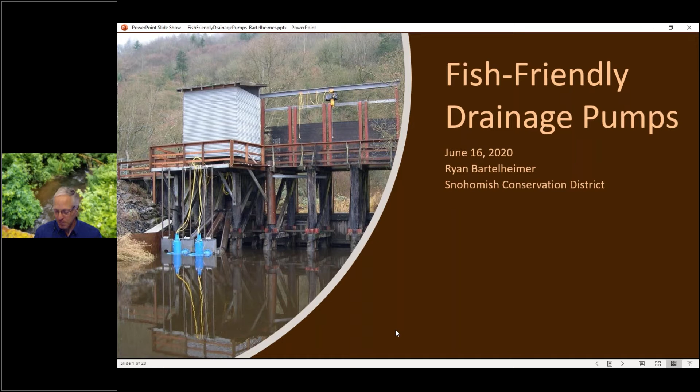Farmers and agricultural producers typically don't have unlimited resources. When it comes to drainage of their farm or operation, they typically rely on gravity as much as possible, which is free, but what's the cost of that? In a situation where the outlet, like in this picture, a tide gate, is into a river, estuary, or slough, especially close enough to receive a tidal signal where the water fluctuates from tides or from rivers running high during flood season or as the snow melts, gravity drainage can be not quite as reliable or predictable as the farmer needs for water table control in their drainage system.

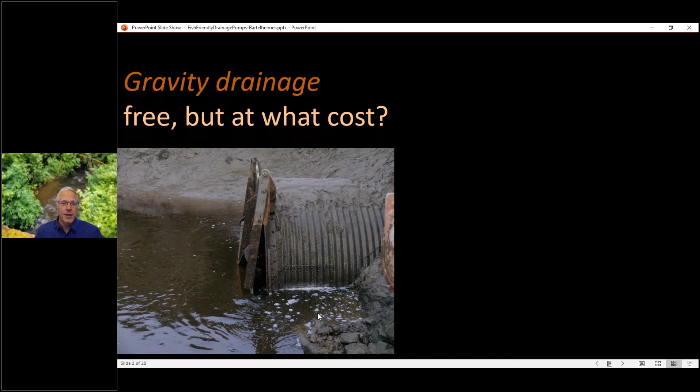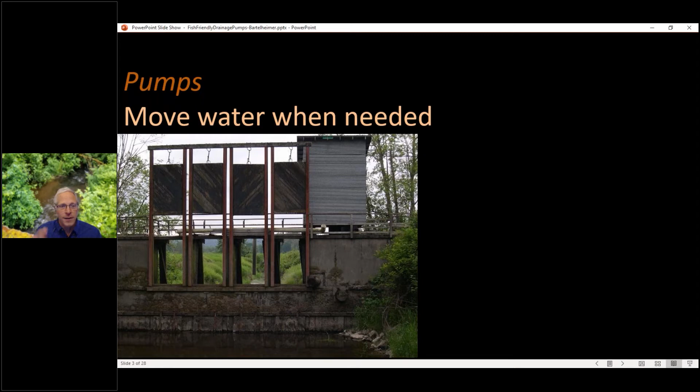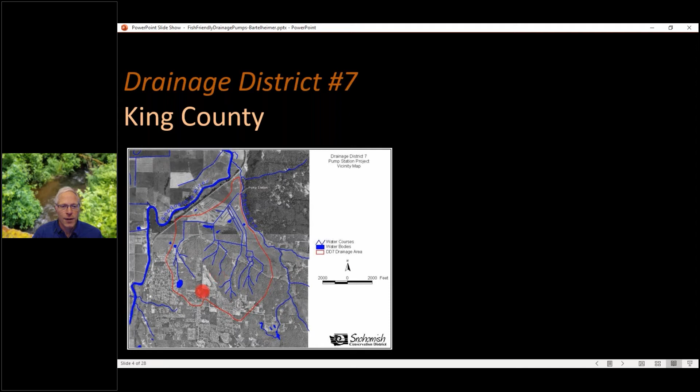Here's a map of this area. The river flowing from south to north here is the Snoqualmie River. This red outlined area is the approximate area of drainage that feeds into creeks and then into the ditches, then through the pump station right at this intersection where it meets Cherry Creek. In addition to fish ending up in this drainage system from floods, there are fish that swim through the tide gates and then spawn in these creeks just north of the city of Duvall, which is in this picture.

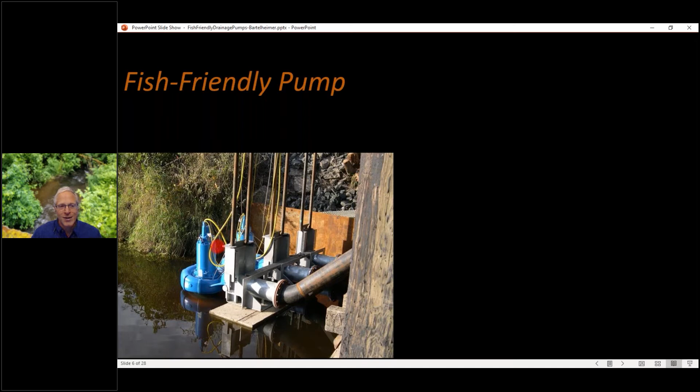This is what these two pumps look like after they were installed at this particular location. They're submersible pumps, which means the motor that drives them is attached to the pump, and all of the connections are watertight so they can be inundated.

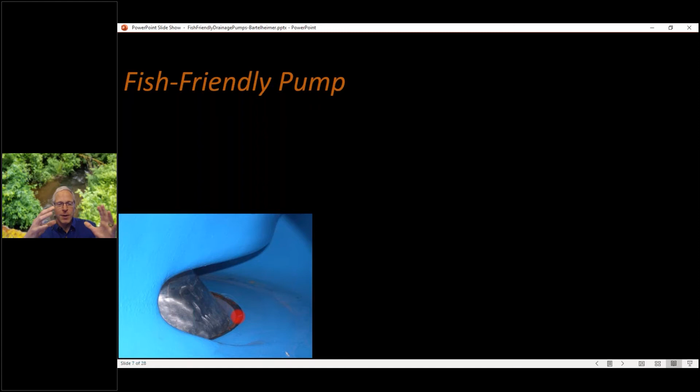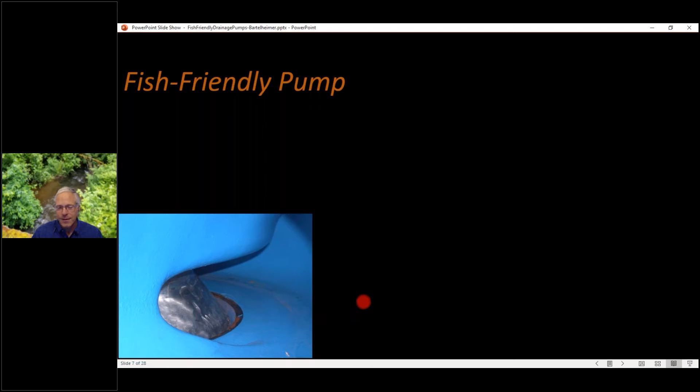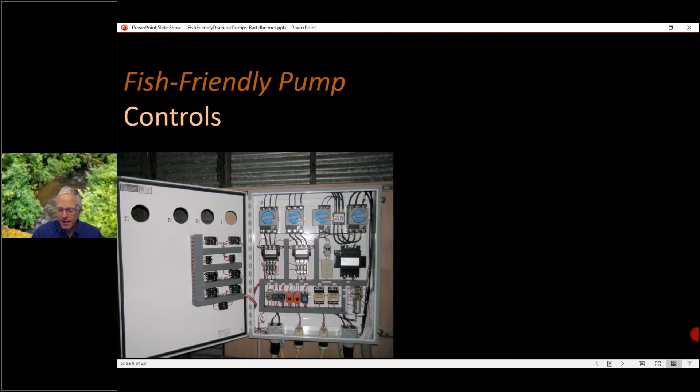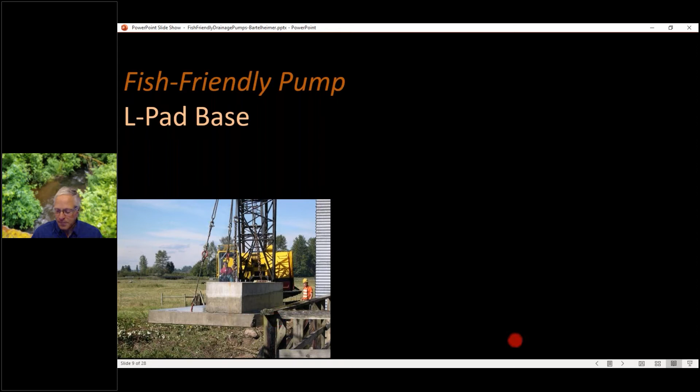I'm going to back up just a little bit and talk about where and when fish-friendly pumps, I think, are appropriate. Number one, a drainage situation - where you've got a drainage district, a flood control district, or maybe just an individual producer or a small conglomeration of producers that have drainage challenges. And also, it's a situation where fish are present or could very well be present.

So a lot of times these pumps are getting to the end of their useful life, and there are permit challenges to being able to just replace a non-fish-friendly pump with another non-fish-friendly pump. A lot of times when you go through the permit process - state, local, federal permits - they want to see things improved for fish. And that's where these pumps help out.

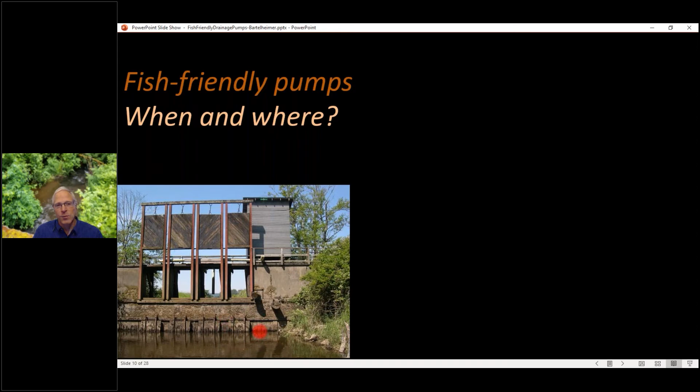Again, this brings up the point, whether it's in a setting like this in a major river valley, or farther downstream in an estuary, it's a competition for limited resources. A lot of very productive agricultural areas, especially in Western Washington, are also areas targeted for fish habitat restoration. These fish-friendly pumps are a great solution to try to make agriculture and fish use more compatible - let the agricultural operations continue, but look for ways to improve the safe use of these areas by fish.

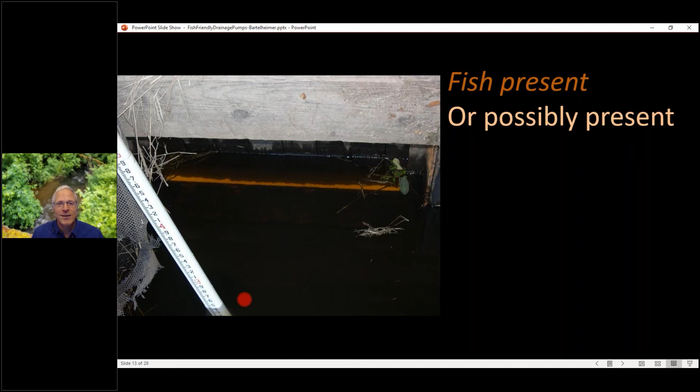By the way, these pumps will handle solids up to about 40% of the size of the discharge pipe. These pumps have a 12-inch discharge, and the size of a sphere that would go through is about 5.5 inches. Just to recap, these fish-friendly pumps are most relevant where fish are known to be present, or they could possibly be present.

And there's that slide. End of slideshow. Oh, somehow it jumped to the end.

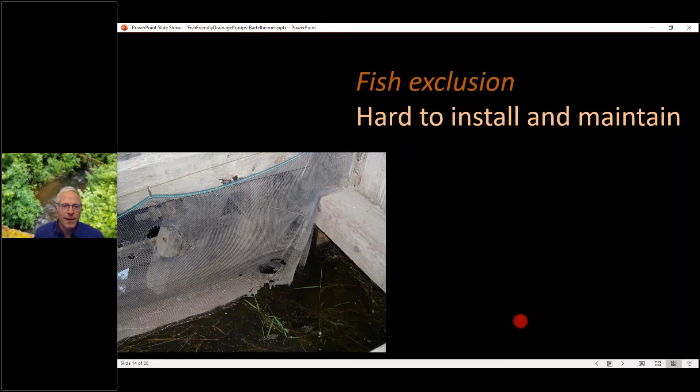The other thing to note, if you did not have a fish-friendly pump and you had fish present, you would be trying to figure out how to exclude fish from that system. It's not easy to do, not easy to maintain. In this picture, this was a temporary approach to try to keep fish out of the non-fish friendly pumps, and I think there were problems both with debris and with beavers chewing on them.

Why a fish-friendly pump? I've covered this quite a bit: keep the fish safe, provide the agricultural drainage that's needed, address inefficiencies or non-fish friendliness of an old system. But another point is to move juvenile salmon or other fish in the direction they're trying to go, without delay.

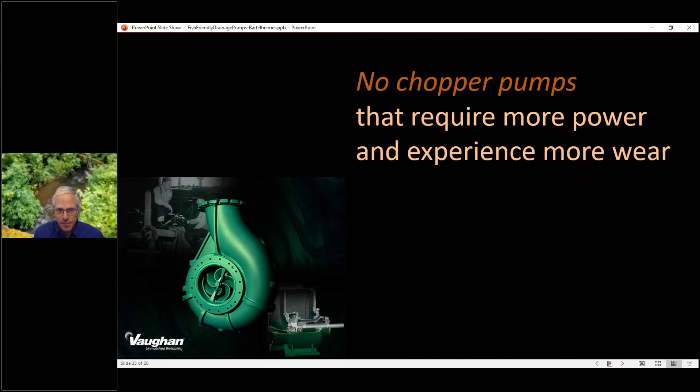Also, again, these pumps are not chopper pumps. If there is some debris that comes through, it generally will pass right through. But we definitely want to avoid having major debris go through, so coarse screens could be appropriate. Part of the strategy for that is a 6-inch clearance between the base of this concrete pad and the bottom of these pumps.

If you think back to the beginning of this presentation, there's a trumpet bell shaped cone on the bottom of these pumps. If you imagine a stick or something else trying to get in there, it has about a 6-inch gap, plus then it would have to make the corner. So this whole system, by its design, is fairly resistant to anything getting in there and causing problems.

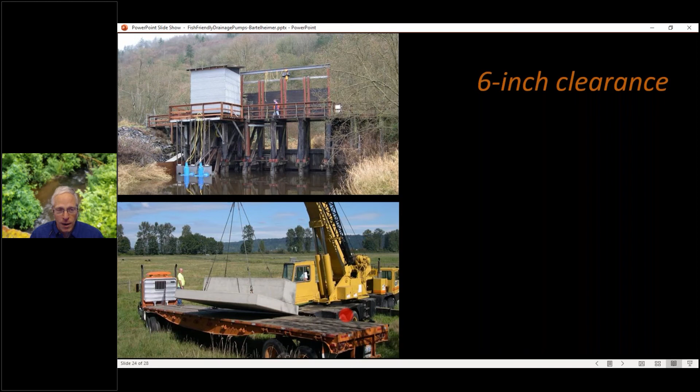Also, as part of its lineage of being a sewage pump, there are fast-out assemblies I didn't point out, but what this enables is these pumps to be deployed and pulled out rapidly. There are stainless steel cables coiled up in this picture. If you imagine a sewer lift station and a pump having a problem, you're not going to dewater the whole vault, pressure wash it, and get in there to work on the pump. You're simply going to hook onto the cable, lift the thing out, put it in a sealed truck, and go deal with it someplace else, hopefully dropping a replacement pump in. So they're very quick to deploy and pull out for maintenance.

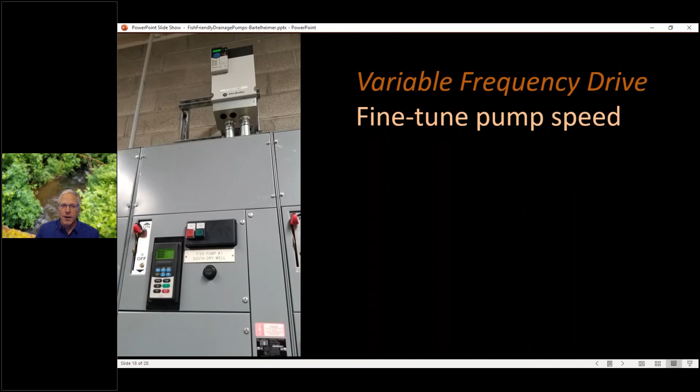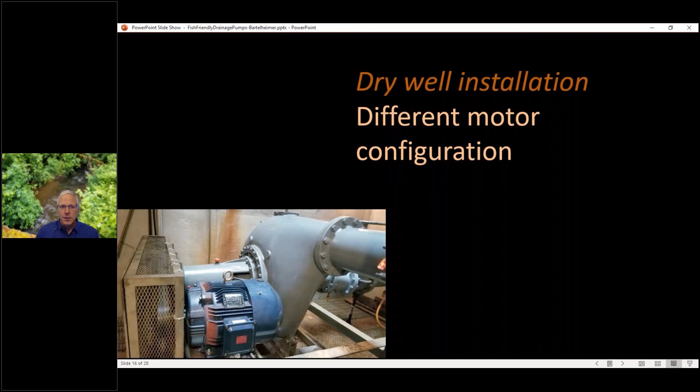As far as maintenance goes, there's really not a lot to do. In both cases, it's really about making sure that the appropriate level of oil is inside. In the case of these blue pumps, they have a moisture sensor, so that if water gets inside, it will turn on a warning light on the control panel. There's also an overheat, a temperature sensor essentially - if the pump overheats, it will shut down and alert you to that.

But one pump - neither of these two, but a similar model at a different district - was not properly assembled. They hadn't fully torqued down the bolts between the motor and the pump body, and everything started up fine. But after they used it for a little bit, there was some wobbling, and excess heat was generated, and it seized up. That turned out to be essentially a manufacturing defect, and that was fixed.

To my knowledge, there have not been any major problems with any of these pump installations, in this case from 2004, and a different district in 2006. They continue to work pretty reliably.

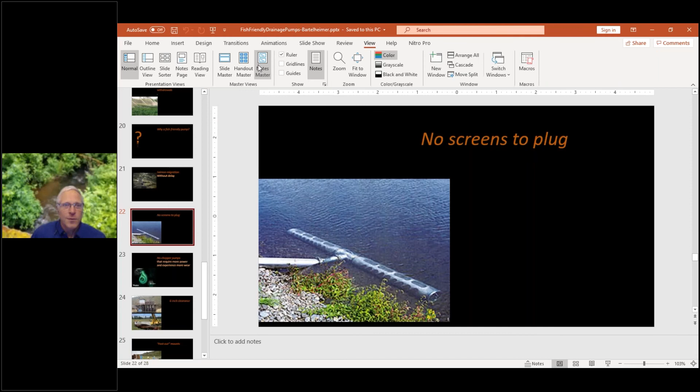For irrigation systems, the premise is that you have a large water body or watercourse with water flowing downstream. And irrigation withdrawals, such as this one, that are screened off, there are some key things to make it work. Number one, you typically don't want it on the riverbed. You also want a certain amount of water both over and under the screens. I can't vouch for this particular one, but you also have a sweeping velocity, so that the vast majority of the water flows by and goes downstream of an irrigation withdrawal. The screen is there to keep debris and fish out of your irrigation system.

Part of the design of these screens is to have enough surface area that the approach velocity to the screens is so low that even if a fish was curious what the blazes this thing is, it's not going to get impinged, sort of sucked up against the screen and not be able to leave. So this is a very different application than these fish-friendly pumps in a drainage situation where everything is going to the pump. That's why there are screens on irrigation withdrawals, and why it's such a challenge if you were to try to use a screening system on a fish-friendly pump.